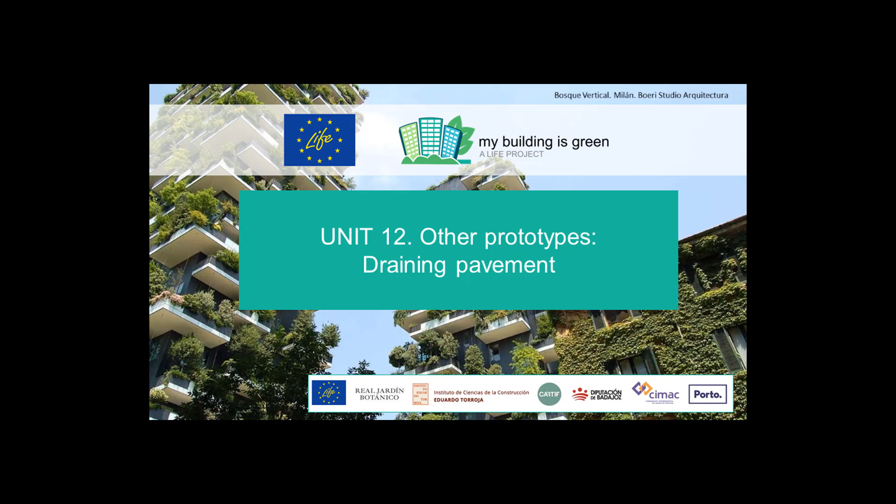The development of the prototype has been made inside the LIFE-myBUILDINGisGREEN project. The aims of this project are the promotion, the improvement and the implementation of solutions based on nature for the adaptation of buildings to climate change.

The initial thought of installing the pavement prototype in 3 demonstrator projects could not finally be performed. A flooring company showed interest in producing a small industrial production of the pavement model, on a very small scale compared to what is usual at a commercial level. This meant that the production cost of the material was very high. This cost of the material, added to the transport and the cost of its implementation, exceeded the budgets foreseen in the demonstrator projects for these work units.

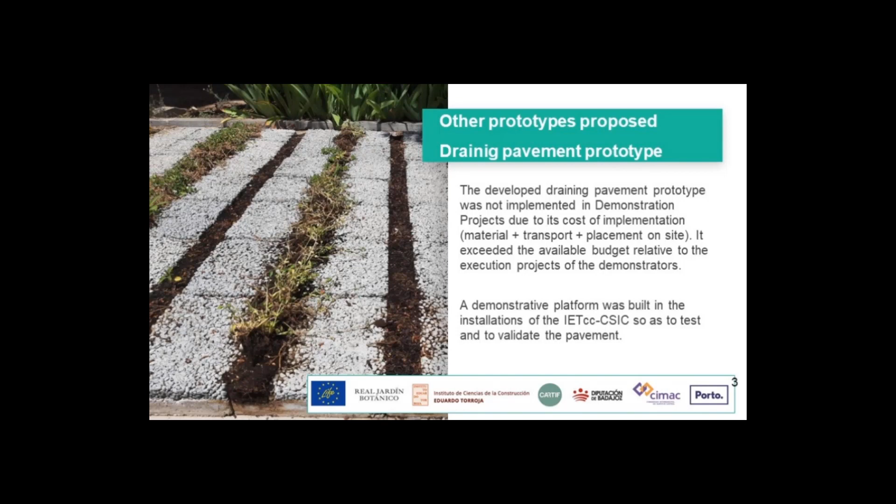On the other hand, a platform for testing and evaluating the prototype has been built at the facilities of the Eduardo Torroja Institute of Construction Sciences in Madrid. And what are the advantages that draining urban pavements bring us?

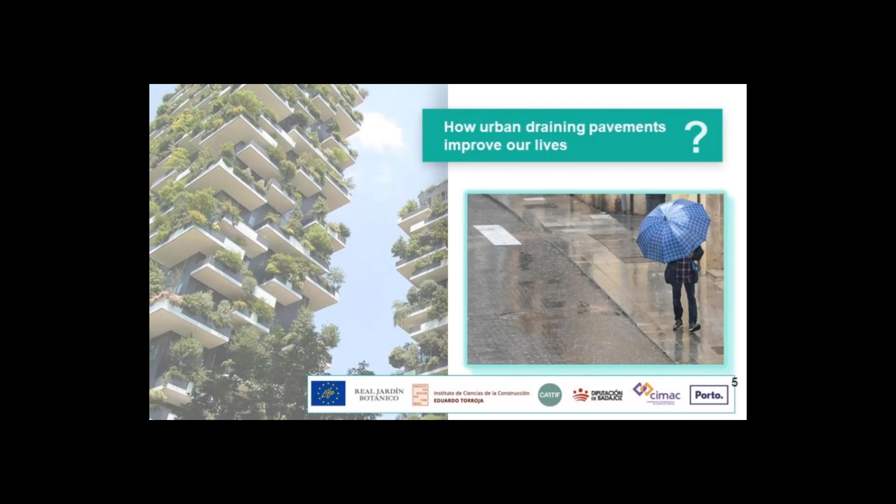On the one hand, we find impervious pavements, asphalt, cement pavements, etc., the most common in our urban environment. This type of paving alters the natural rainwater flow by preventing it seeping into the ground. This generates the accumulation of water on the surface, puddles, and an increase in runoff flows or surface water flows, with the consequent dragging of materials and pollutants to the evacuation system and risk of flooding if its evacuation capacity is exceeded.

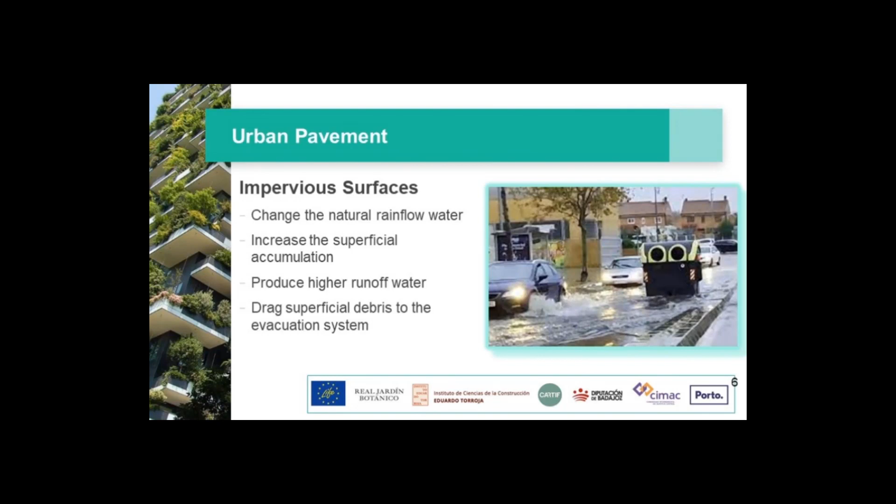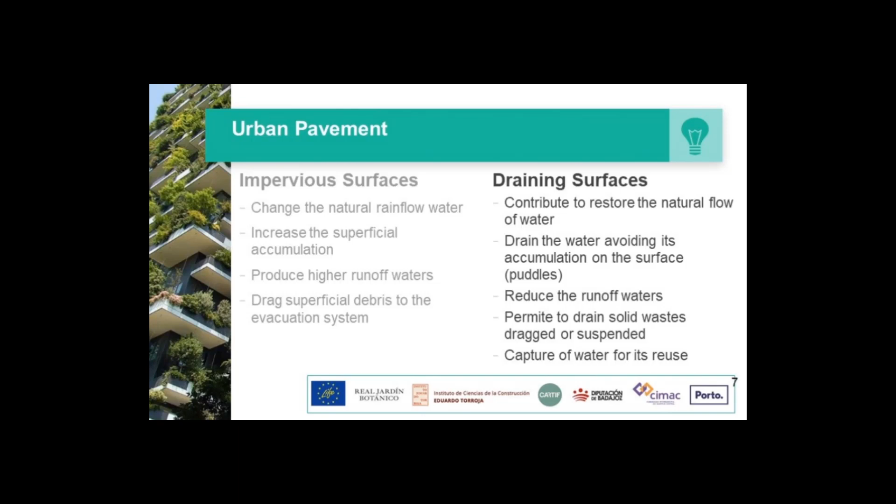On the contrary, permeable urban pavements contribute to restoring the natural flow of water, allowing it to filter into the ground. This prevents the accumulation of large flows on the surface and reduces the volume of water circulating on the surface. In addition, this type of pavement allows the filtering of waste or contaminants carried by the water. Also, in combination with other elements, it allows the accumulation of rainwater for later reuse. In these 2 images we can see some of the aspects discussed above.

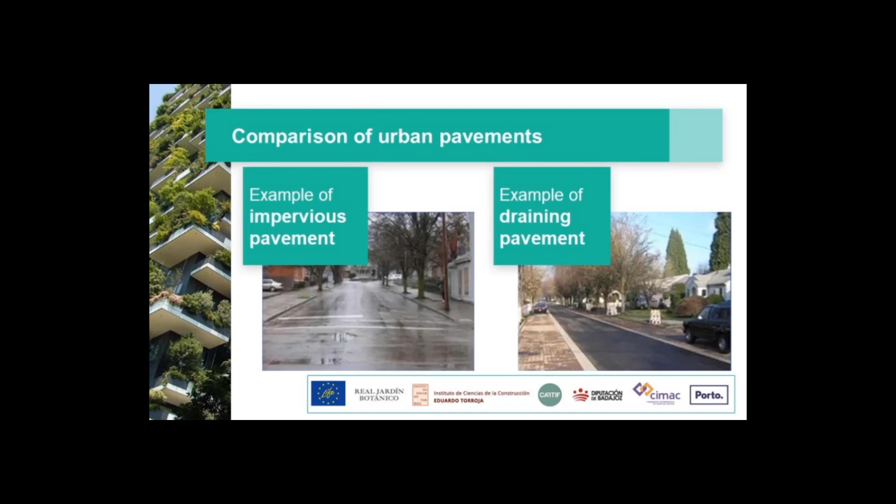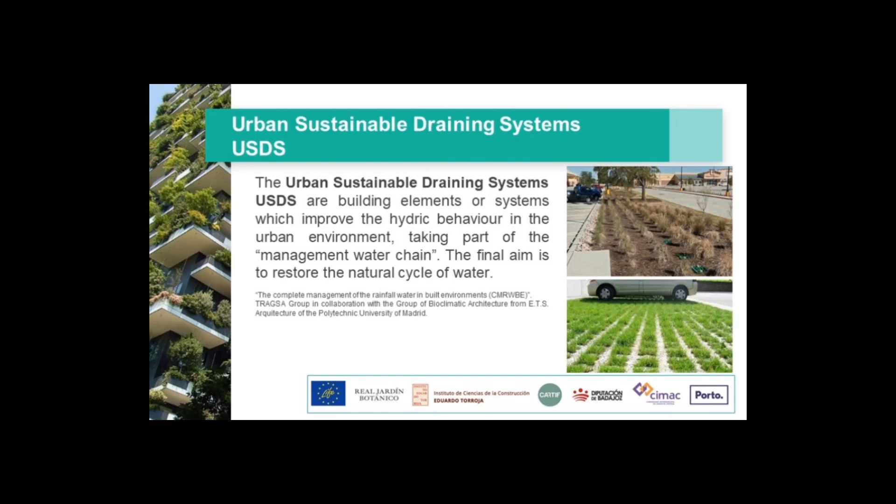We now go on to explain the urban sustainable drainage systems, known by their acronym, USDS. Through the implementation of USDS, we seek to recover the natural water cycle. To this end, construction elements or systems are used. These improve water behavior in the urban environment. Within the water management chain, these types of systems are characterized by allowing the filtration of rainwater, reducing surface runoff.

With their use, the risk of accumulation of water on the pavement surface decreases, as does the risk of flooding, since we reduce peak flows due to the accumulation of precipitation flows. In addition, the drained water can be accumulated in deposits for its later reuse, or it can be filtered into the ground to recover the natural aquifers.

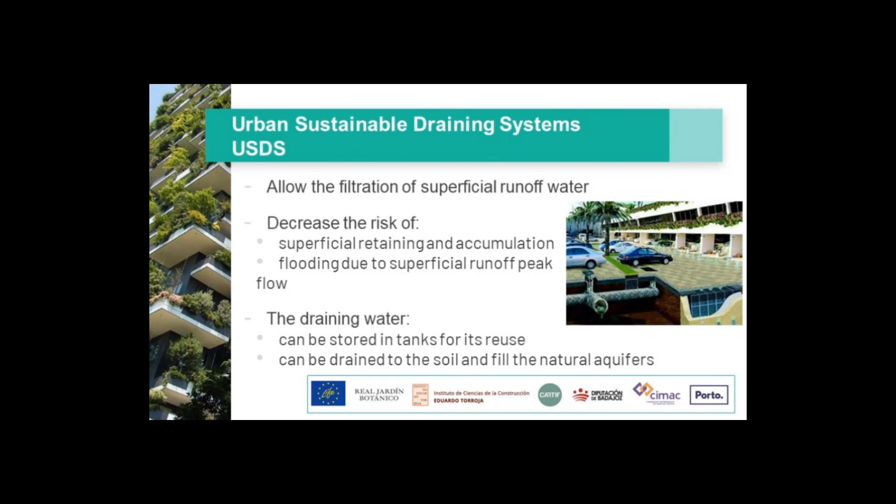There are many classifications of the types of urban sustainable drainage systems. If we look at the type of measures that are used, we can classify them into those that use infiltration measures, absorbing surface runoff and infiltrating it into the natural terrain. Among these, we can find wells and infiltration ditches or rain gardens, among others. Those that use filtration measures, which retain and filter the particles carried by urban runoff. We can cite, for example, bioretention areas, filter strips and ditches or draining pavements.

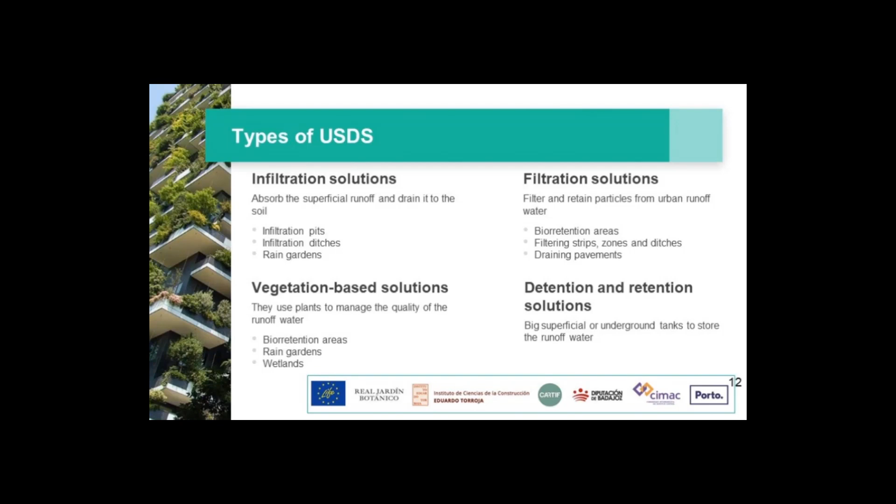We also find the measures that are based on the use of vegetation. With the incorporation of vegetation, the aim is to improve the quality of runoff water. We can cite bioretention areas, rain gardens or urban wetlands. The 4th group would frame the detention and retention measures. Here we can mention the large deposits for the storage of rainwater, which can be superficial or underground. Most systems tend to combine measures from these 4 large groups. Next, we will see some examples of urban sustainable drainage systems. The vegetable covers.

They act on the precipitation water on the surface of our buildings and are based on a series of layers of accumulation, evacuation, filtering and support of the vegetal cover.

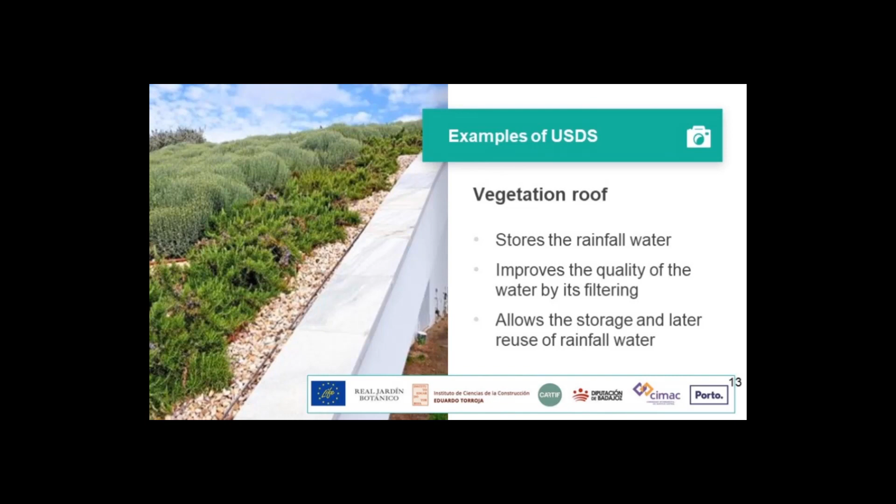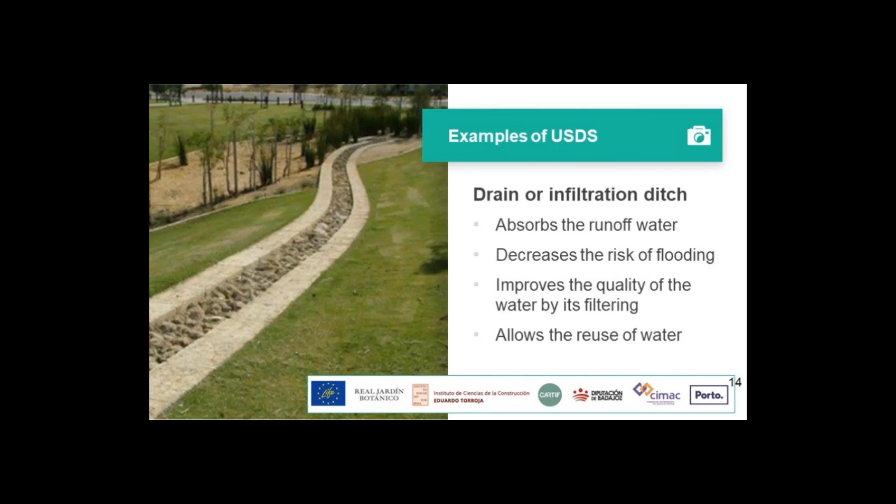In this other image we can see an infiltration ditch. They are used to absorb surface runoff water, infiltrating it into the ground. This reduces the risk of flooding due to the accumulation of peak flows on the surface. In addition, it improves the quality of the water by filtering it. If used in combination with a storage system, they allow the subsequent reuse of water.

Another system is retention deposits. As we can see in these images, they can be superficial or underground. Its main function is to retain and accumulate rainwater. With their use, the risk of flooding is reduced, by reducing peak flows, and it is also possible to reuse the accumulated flows.

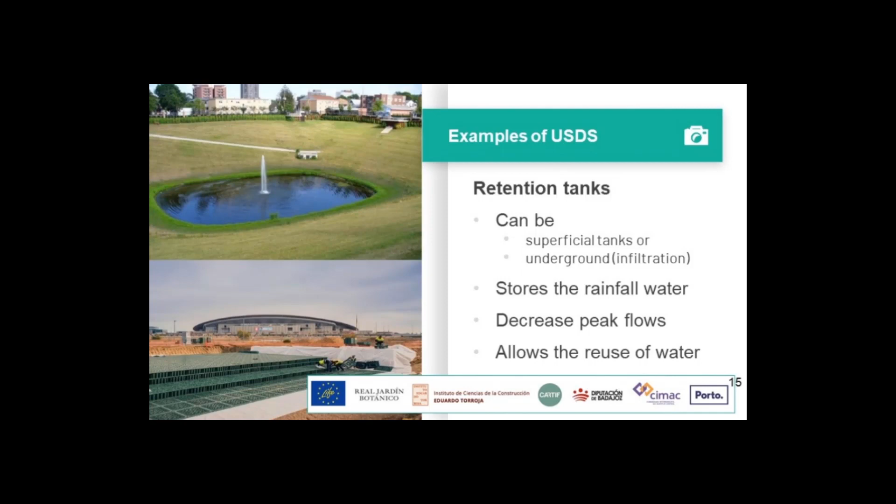Rain gardens, like the one in these two images, are areas with vegetation that in case of precipitation can flood, thus retaining rainwater. This makes it possible to reduce the risk of flooding, by reducing peak flows. The use of vegetation allows to improve the quality of the water, through its filtering, and helps to regenerate the urban landscape.

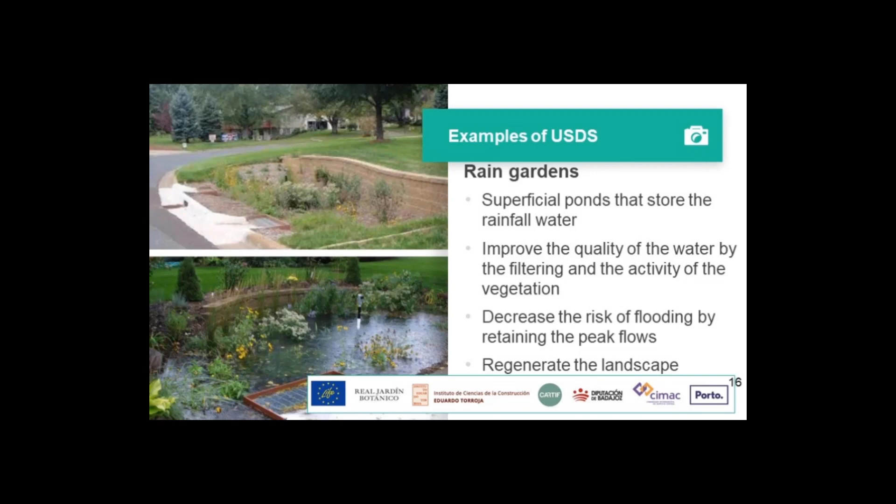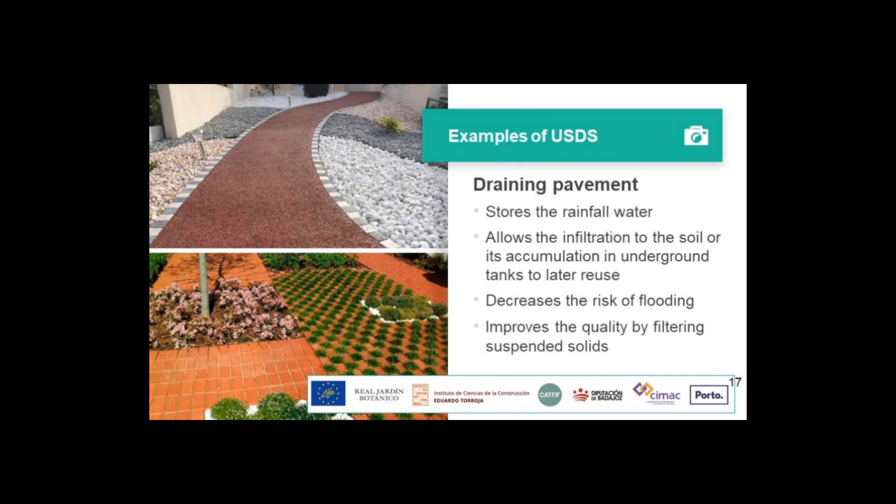Another example is draining pavements, already mentioned. This type of pavement retains and absorbs rainwater and improves its quality by filtering the suspended solids carried away. By retaining water, the risk of flooding is decreased. Its use allows rainwater to infiltrate the ground or its accumulation in underground deposits for later reuse.

What are, then, the main characteristics of urban draining pavements? First of all, they respond to the functions for which they have been designed, resisting the loads and the wear and tear of intended use, pedestrian, light and heavy vehicle, etc., draining surface water, filtering dragged solids. In addition, other capacities can be added, such as photocatalytic activity.

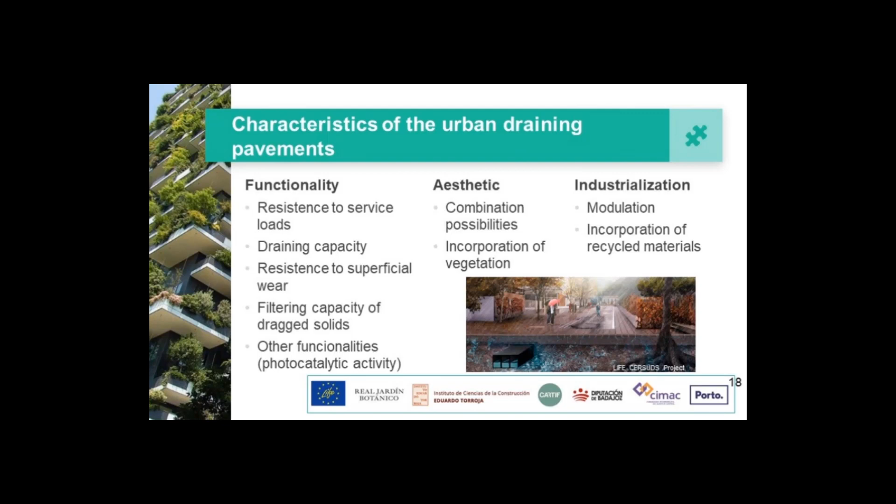It also brings aesthetics to the city. It can be combined with other materials or it can incorporate vegetation. And since it is an industrially produced material, it is usually modulated and has the possibility of incorporating recycled materials in its production, for example recycled aggregates. We now go on to show the draining pavement model developed within the LIFE project.

When one of the participating schools was visited as a future demonstrator project, it was observed that the outer areas of the schoolyard were made of compacted earth. This type of paving has little filtering capacity when it becomes saturated. For this reason, in a climatic zone like that of the participating centers, characterized by regular rainfall and sporadic torrential rains, accumulations of surface water in muddy areas that affect the functionality of these recreational areas occur.

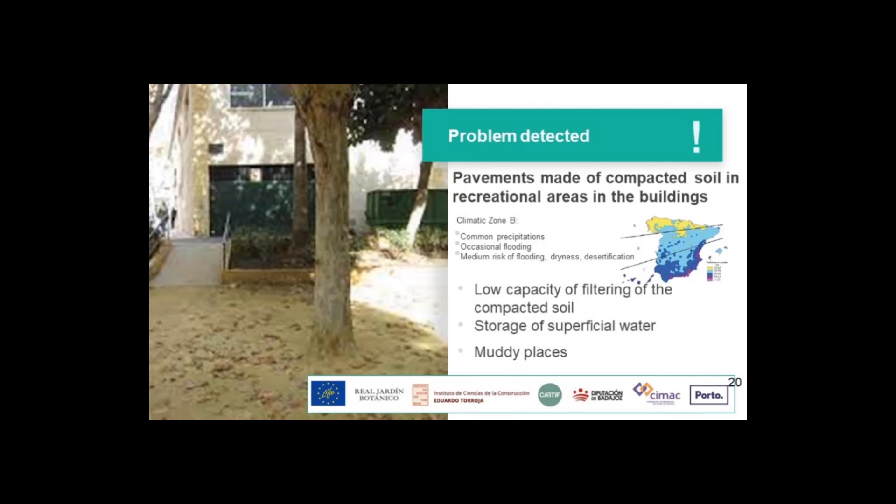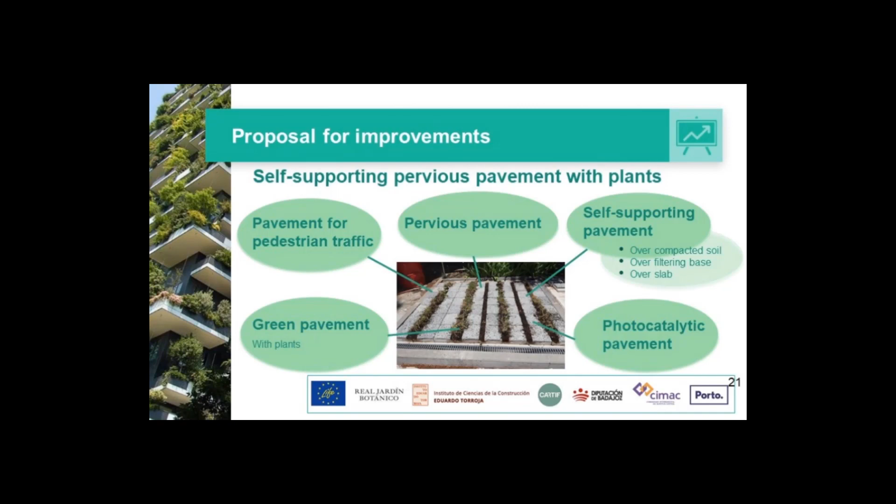To avoid these problems, within the LIFE project proposal, it was proposed to develop a self-supporting, draining pavement that incorporated vegetation, to contribute to the renaturation of the environment. The premises to which the prototype should respond are: pavement for pedestrian traffic, with draining capacity, that it be a self-supporting pavement, that could be installed directly on the ground, on a filtering base or on a concrete slab, that it incorporate native creeping vegetation, and it would also provide photocatalytic properties, which allow the reduction of environmental pollutants, NOx.

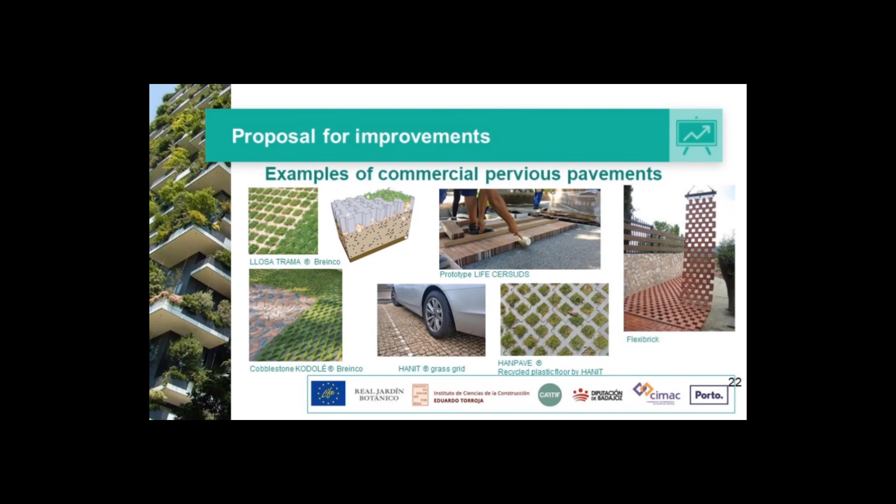There are various types of draining pavements on the market. There are concrete, ceramic or plastic models. Each of them responds to one or several of the characteristics sought, but none responds to all of them together. Next, we are going to describe the draining tile developed in the project.

drained water towards the vegetal channel. The second layer is executed with a draining porous mortar, made of cement and selected gravel. This layer leaves a channel on one side of the tile to arrange the plant substrate and vegetation.

To verify the functionality of the tile, the battery of tests included in the standards applicable to this type of tile flooring or cement paving stones and draining flooring have been carried out.

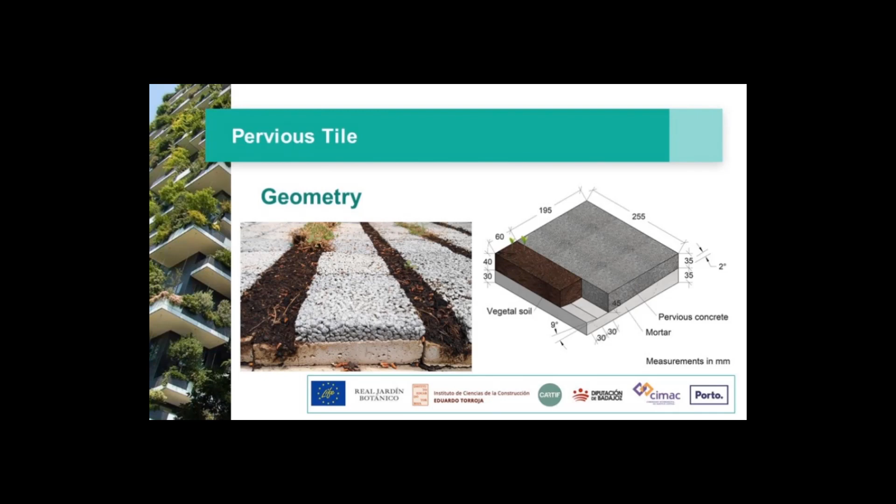The bending resistance, Class 1 ST, has been tested and the breaking load has been obtained, Class 30 marking 3T. With this classification, the tile can be used as paving for pedestrian traffic.

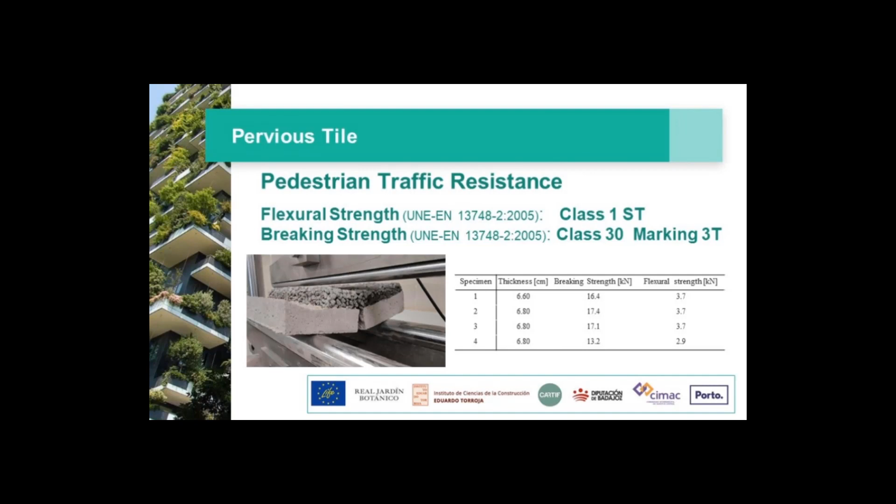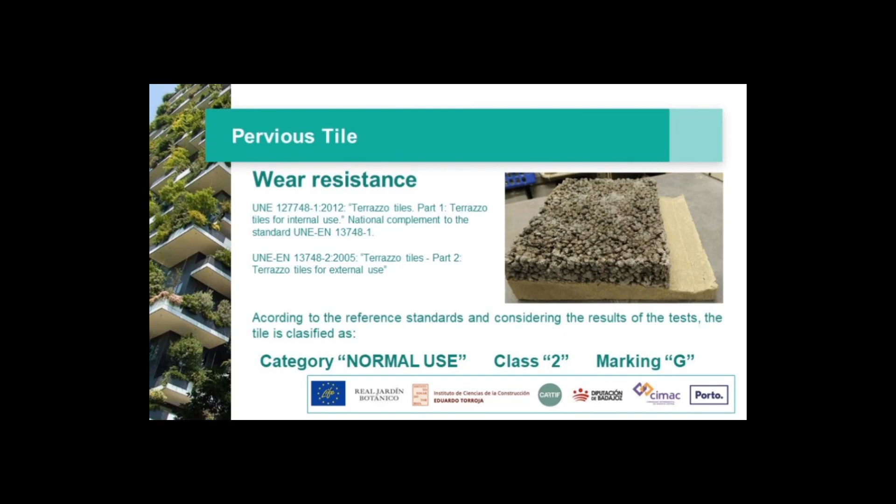Its resistance to wear and tear has been tested, classifying it as Class 2G marking based on the result obtained. This classification makes it suitable for normal use, pedestrian traffic, for example.

In the slip test, the result obtained allows it to be classified as Class 3, suitable for use on outdoor pavements as established by the Technical Building Code.

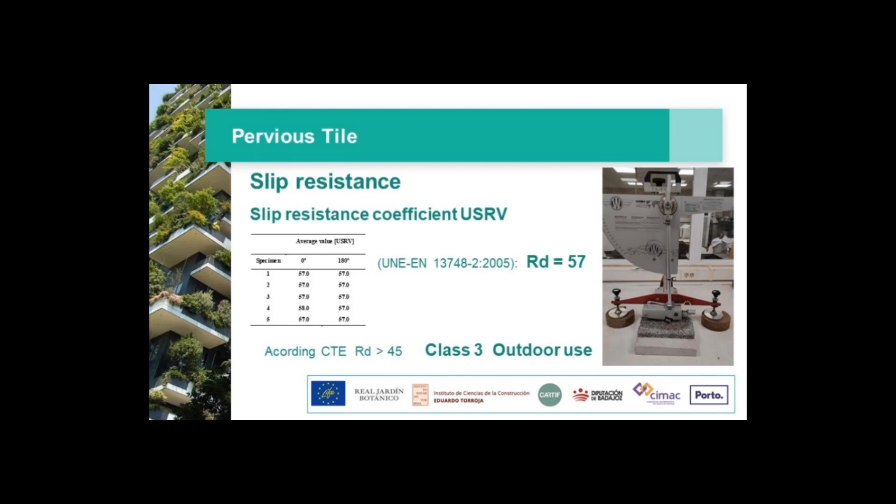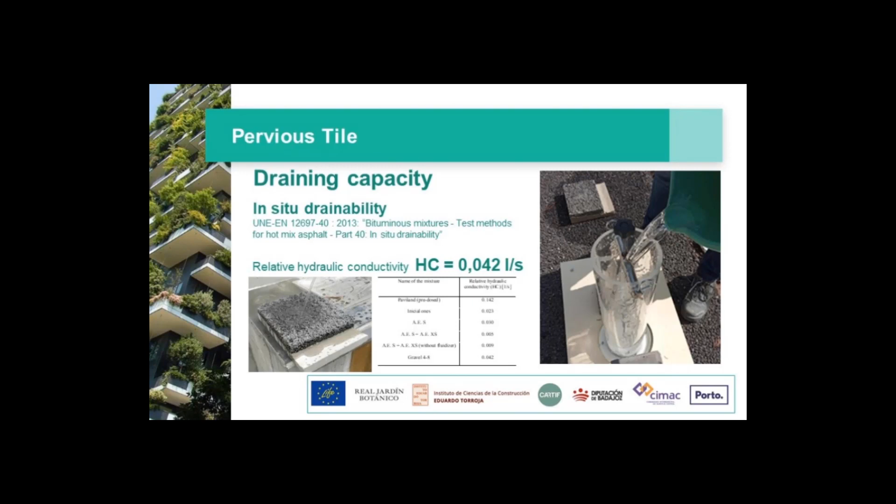Its draining capacity has also been evaluated by calculating the open porosity. A value of 9.8% has been obtained.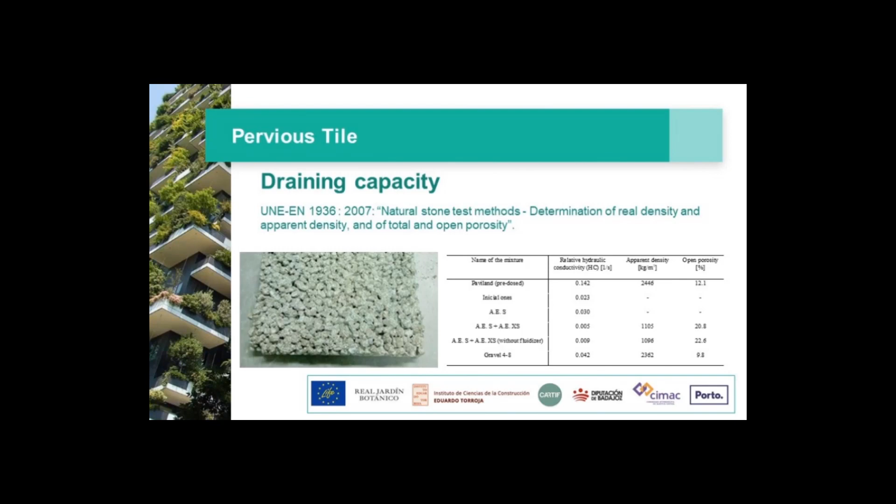To assess the durability of the tile, its resistance to deterioration caused by the action of atmospheric agents, the average water absorption and capillarity absorption have been tested, in accordance with the reference standards. For both parameters, the test values obtained comply with the requirements of the standard.

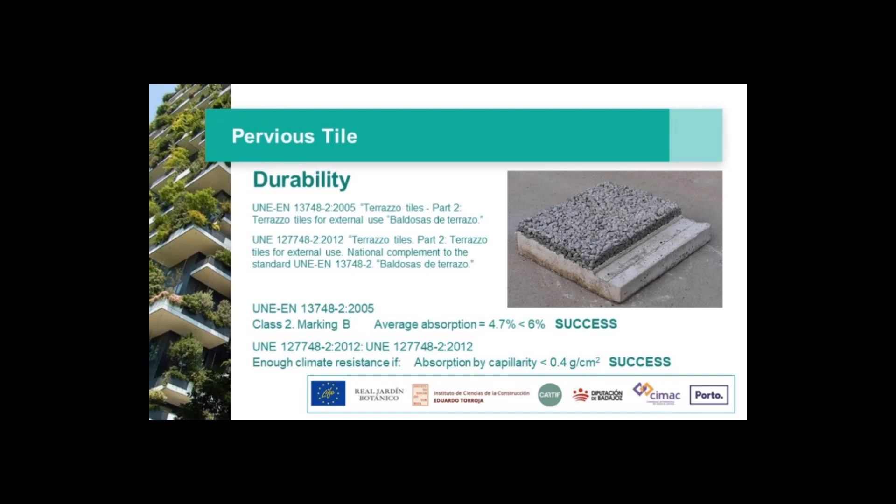Photocatalytic materials, in combination with a light source that provides energy, allow through chemical reactions to eliminate contaminants from the environment, NOx, and keep the pavement clean.

In the demonstrative platform executed, a photocatalytic activator has been applied to half of the installed tiles.

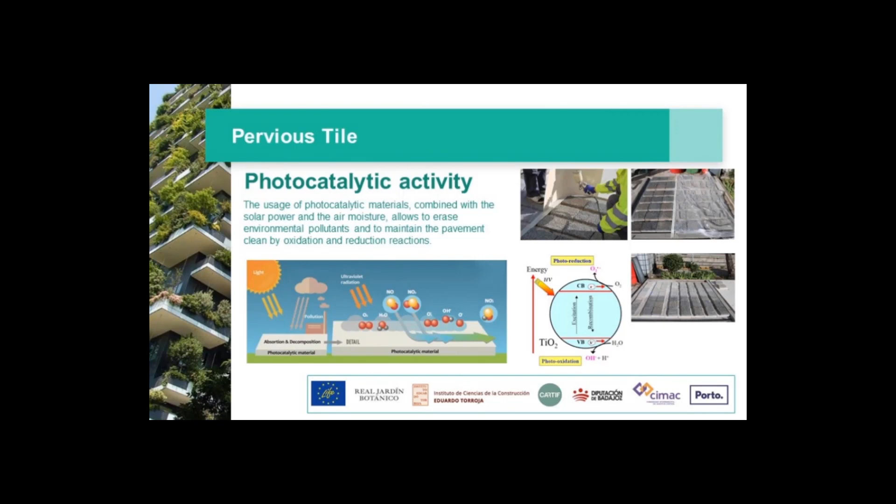The tile prototype developed is completed with the installation, in the drainage channel, of a vegetal substrate and the planting of native creeping vegetation. In this case, Phyla nodiflora has been used.

For the prototype, the use of cartridges with the pre-mixed mixture of plant substrate and seeds, bagged in compostable material, has been foreseen, as can be seen in the upper right photograph.

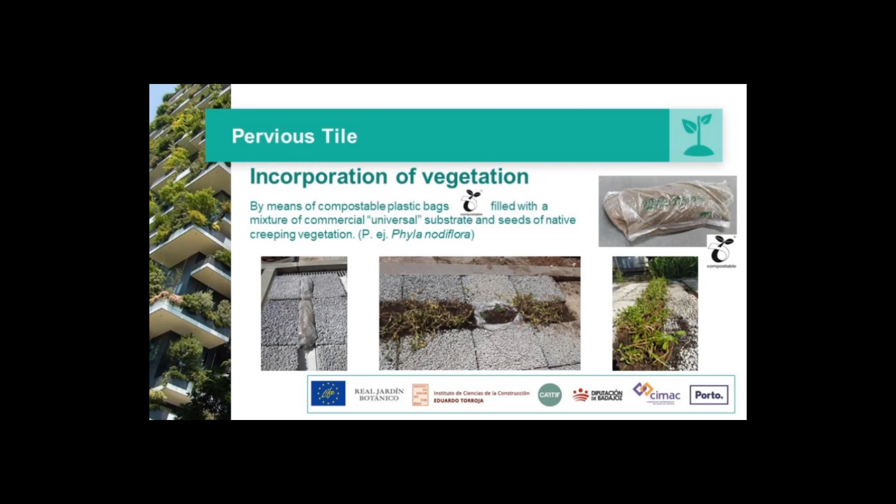Here we can observe various possible configurations of the pavement, by combining the tile in different positions. Two of the linear configurations have been arranged on the platform, with a single channel or with a double channel.

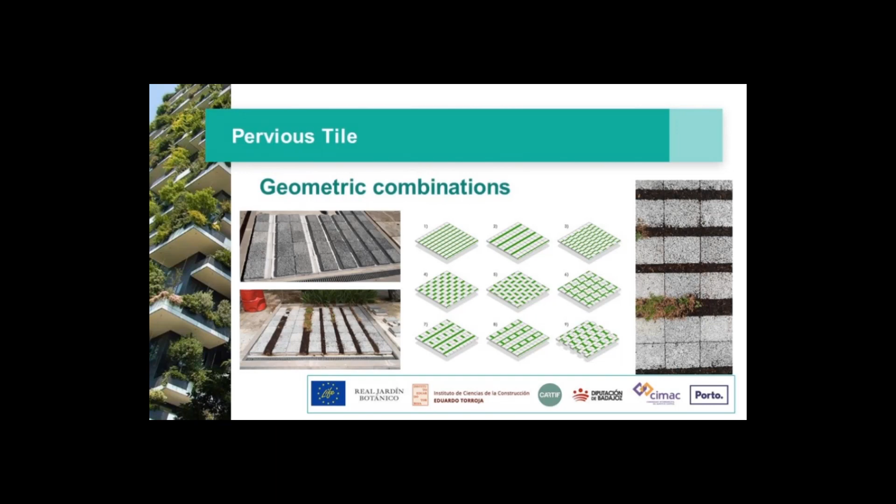Next, we will show various images of the demonstration platform executed in the facilities of the Eduardo Torroja Institute of Construction Sciences, in Madrid.

The first image shows the platform being installed, in June 2021. The second image shows the complete platform and once the photocatalytic material has been applied.

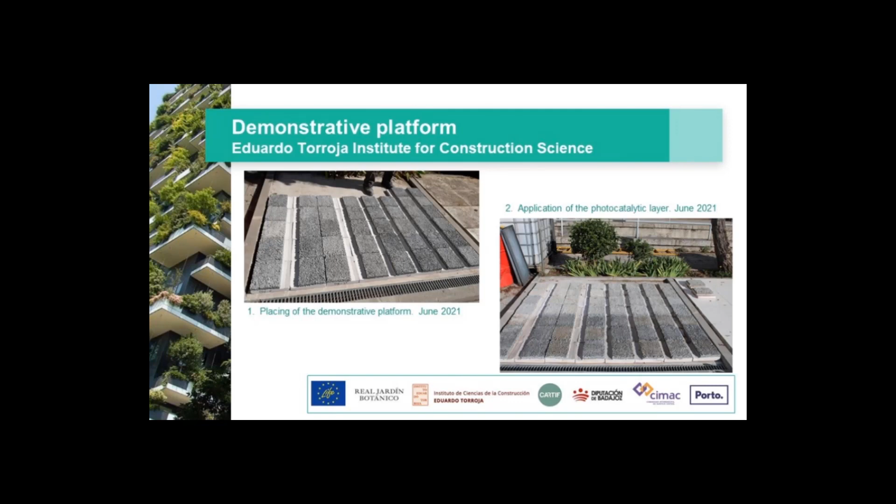In the third image, we can see the installation process of the plant substrate and the specimens of Phyla nodiflora. Due to problems in the supply of the plants, this planting could not be carried out until April 2022.

The fourth image shows the state of the platform in June 2022, after a period of drought that caused the loss of the first plantation.

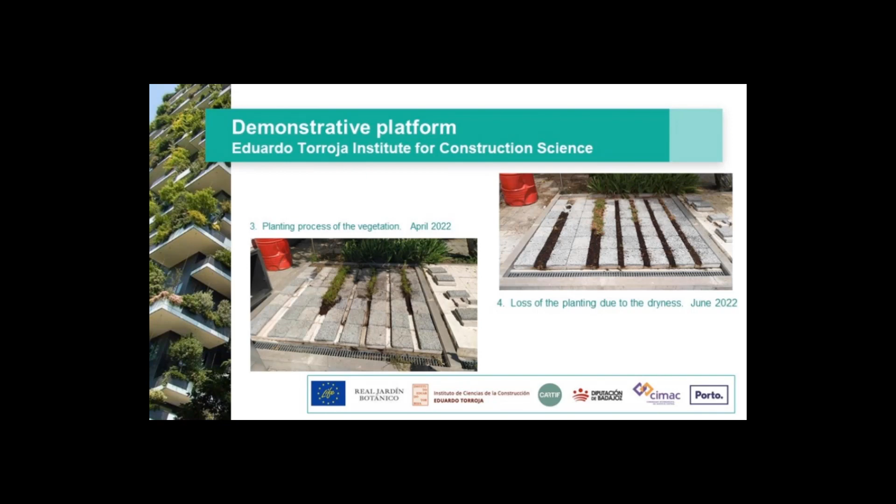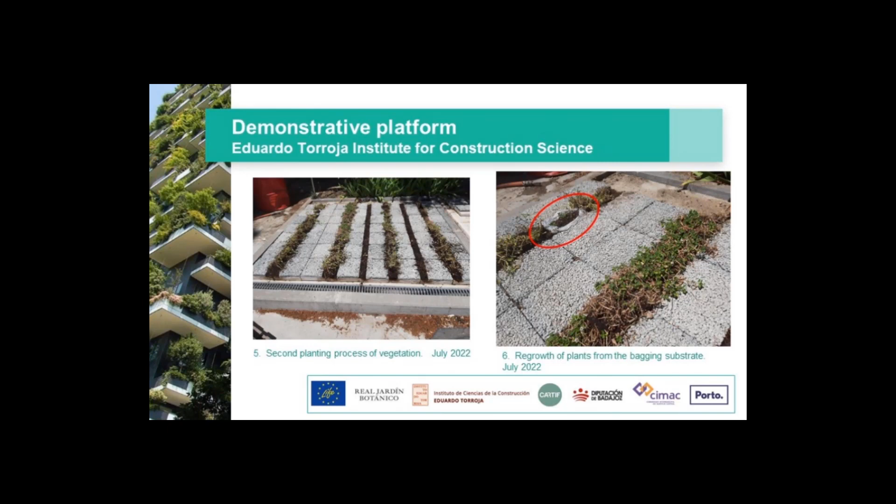To finish this presentation, we bring the industrial production proposal for the developed prototype.

The design of the developed prototype was sent to the company Breinco Smart for its study and estimate of the manufacturing cost. Based on the initial solution of the LIFE project, the company presented its proposal, with slight changes to adapt the prototype to its production processes.

For this proposal, with a small initial production for its installation in the 3 demonstration projects foreseen in the LIFE project, the company presented an economic offer that amounted to €110 per square meter.